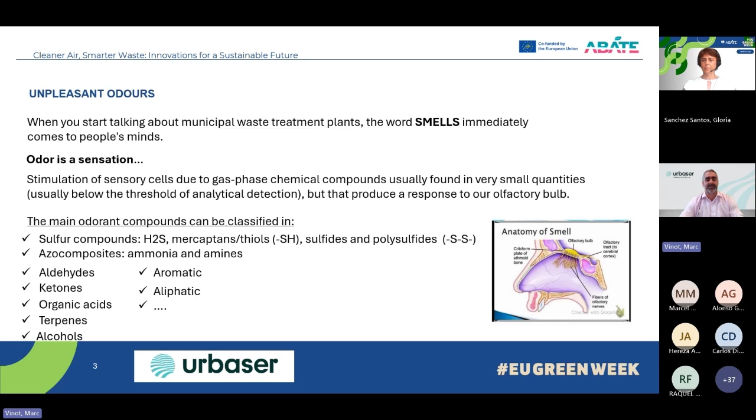The main odorant compounds, if we want to classify by main groups: we have the sulfur compounds - H2S, mercaptans, thiols, sulfides, and polysulfides; the azo compounds, ammonia and amines, aldehydes, ketones, organic acids, terpenes, alcohols, aromatics, aliphatics. This is the main list - there is more, but these are the main ones we get when we speak about odor compounds.

In waste treatment facilities, the main odor sources are the nitrogen compounds originating from the decomposition of nitrogen compounds present in the waste. The compounds we get are ammonia - the urine smell; amines - fishy smell; the sulfur compounds from the anaerobic decomposition of the organic fraction. We get hydrogen sulfide - this rotten egg smell; methyl mercaptans - rotten onion smell; dimethyl sulfide - this cabbage smell; and dimethyl disulfide - also mainly cabbage smell.

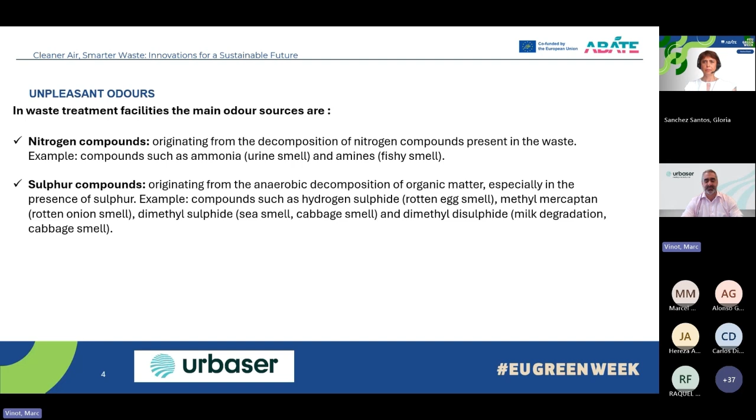We also get nitrogenous organic compounds originating during the decomposition of proteins and amino acids we get in the organic residues or in the food waste, and the VOCs.

For example, in aerobic and anaerobic decomposition processes of organic material, we have a very high production of VOCs that contain carbon and are volatile at room temperature. So we get alcohols, aldehydes, ketones, esters, terpenes, and volatile fatty acids.

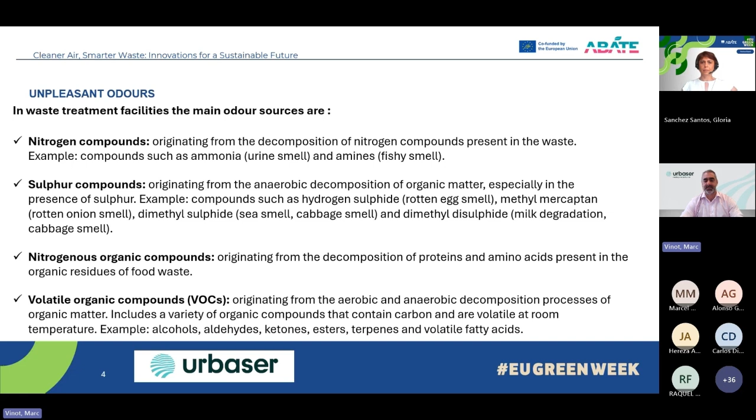So here we have a table of some chemicals with the odor threshold in ppm and the characteristic odor sensation we get with all these chemicals.

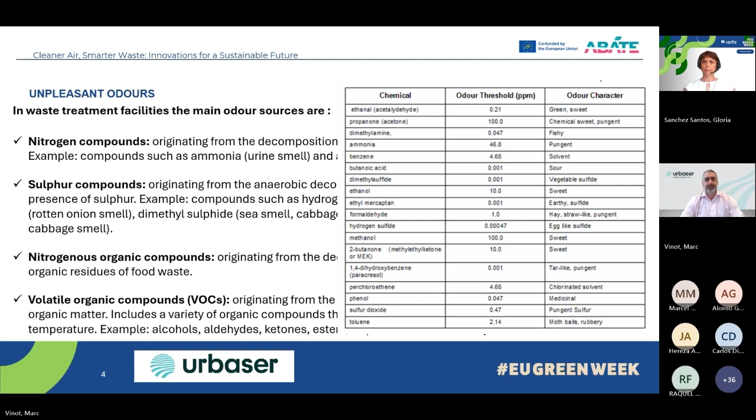Now, if we focus on municipal waste treatment plants, we have some areas where we have a higher generation of odors. The first building or unit where we get this generation of odors is the reception and storage pit, because when we get waste, especially waste with high content of biodegradable material, it's prone to decomposition and odor generation. The pit can have around 2 to 3 days capacity of storage, so we keep the material in this pit for a long time.

Depending on the country, the frequency of collection of waste from the house is quite different. For example, for bio-waste in Essex, it's nearly once a week. So when the waste arrives at the facility, it has already spent a week in a container. Depending on these two things, we can have very high emissions of VOCs and other compounds.

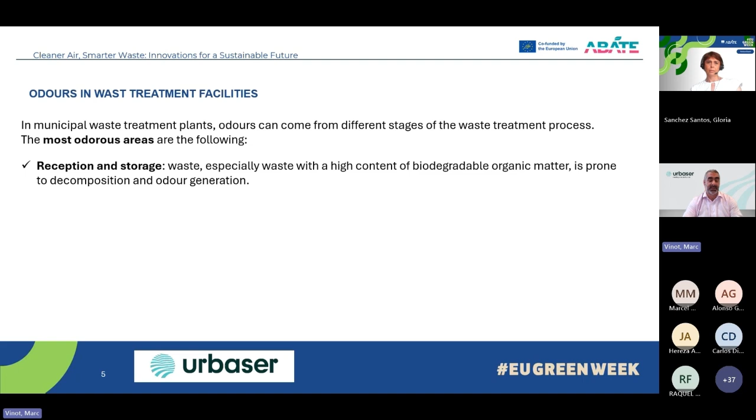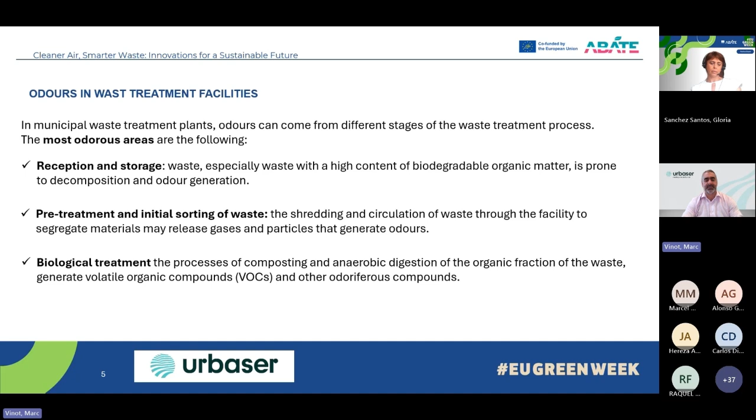Afterwards, we have the pretreatment and initial sorting of waste - the shredding and circulation of waste through the facility to segregate materials - which also releases gases and particles that generate odors. After that we have the whole package of biological treatment - composting and anaerobic digestion of the organic fraction of the waste - and this also generates volatile organic compounds and odoriferous compounds.

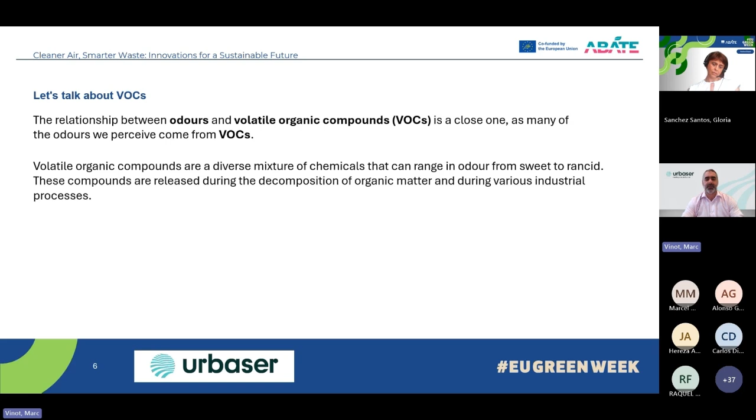So here's the main units where we got this generation of odor compounds. And if we focus on VOCs, there is a very close relationship between odors and VOCs. We all know this. These are diverse VOCs, a diverse mixture of chemicals that can range in odor from sweet to rancid, released during the decomposition of organic material, as I said before.

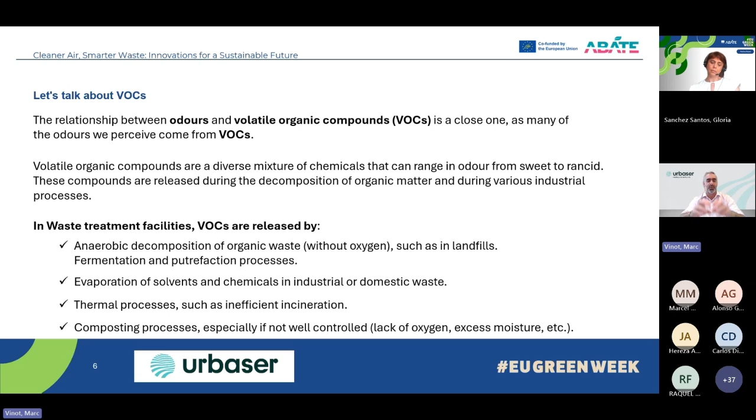In waste treatment facilities, VOCs are released by the anaerobic decomposition of organic waste without oxygen, such as landfill and fermentation in digesters, putrefaction processes, and evaporation of solvents and chemicals in industrial or domestic waste. Thermal processes with inefficient incineration can have very high concentrations of VOCs at the output, and composting processes, especially if not well controlled, with lack of oxygen or excess moisture. Even in a well-controlled composting tunnel, there is always some zone with lack of oxygen, so some points of anaerobic decomposition occur a lot.

But if we go into the different areas I mentioned before, for example the reception building and storage pit, sorry the tables and graphics are in Spanish, we see that we have VOC curves between 13 and 11 ppm, which in odours is about 6 to 2.2 thousand odour units.

And if we look at the main groups of compounds we got in this part, it's aromatic hydrocarbons, ketones, then some terpenes, a little bit of alcohol, and aliphatic hydrocarbons, organic acids, esters, and some halogenated compounds.

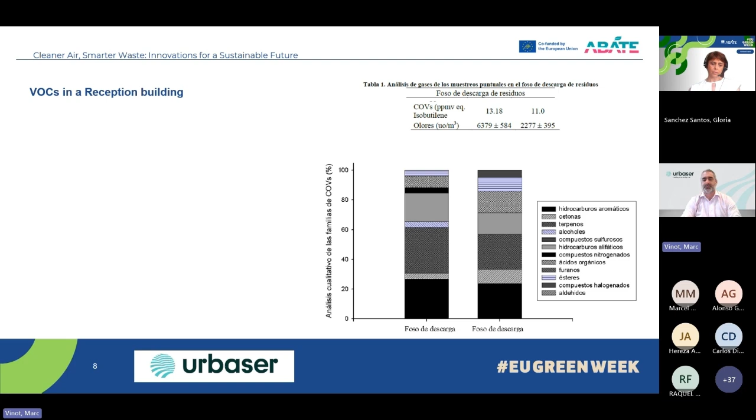Okay, and we see for example, during 48 hours, we can see some peaks due to a very high quantity of trucks coming into this area.

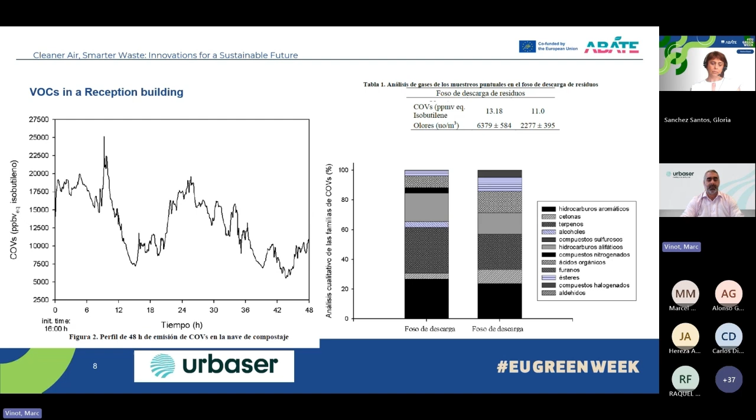If we go to the pretreatment building, we can see that the curves are quite high, between 31, 4, nearly 5 ppm, depending on the hour of the day, meaning depending on how it's working, and between 12.3 thousand to 900 odor units per cubic meter. The main families are the same as the ones we got in the reception area.

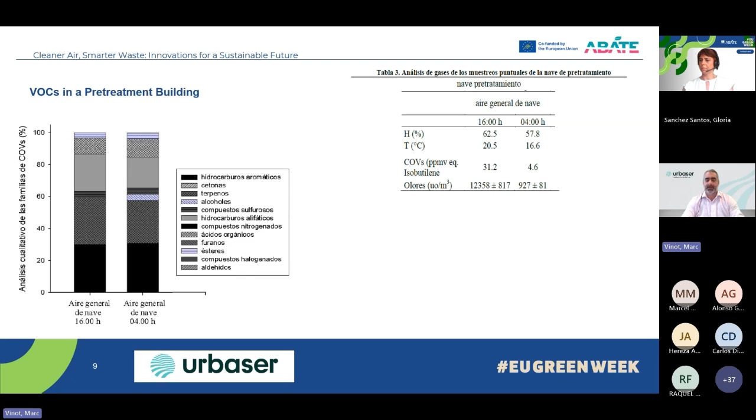If we go to specific equipment in pretreatment, it's quite different. If we go to a ballistic separator, for example, we are about 22 ppm of VOCs, but in odor it's only 3.5 thousand odor units. In a refuse press, the quantities are lower in terms of VOCs, between 3 to 10 ppm, and 400 to 2,000 odor units, depending on the moment of the day. In terms of families it's the same, but we start to have aldehydes in some equipment, found at the top of the columns of each piece of equipment.

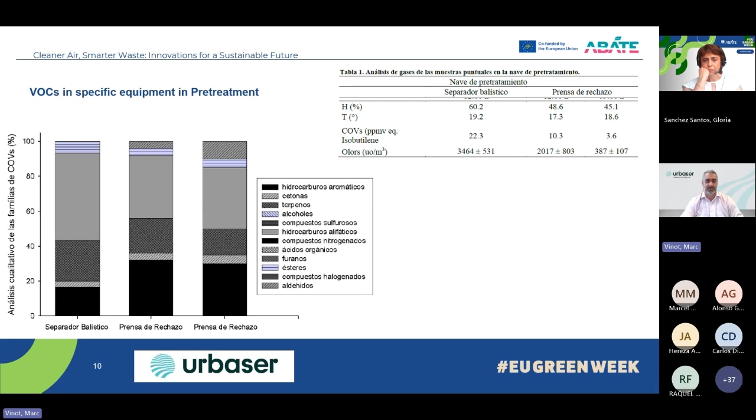If we go to a composting unit, we're in a composting building. We got VOCs around 17 to 7, depending on the moment of the day, and between 6 to 2,000 odor units. It occurs the same in terms of the families of VOCs, with some aldehydes at the end, esters and aldehydes in the composition.

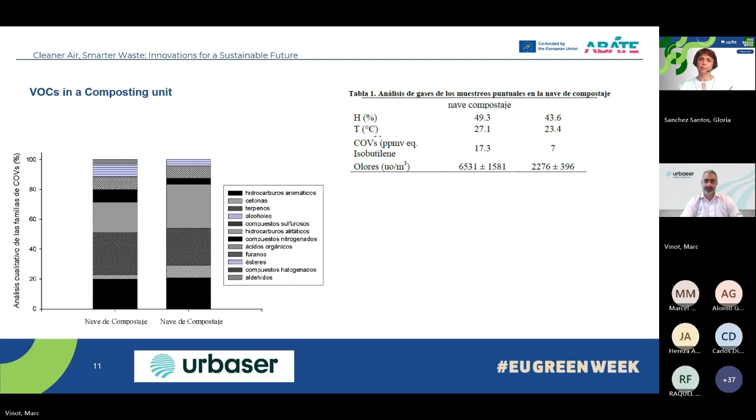So as somebody mentioned before, speaking about the limits, we have to comply with some limits in terms of emission, the total VOC. This is indicated in the decision of the EU, 2018/1147, the BAT.

And if we go further, there is a definition of VOC based on an article of the directive 2010/75, and in BAT 34 it explains the different technologies to reduce the emission of dust, organic compounds and odorous compounds, including H2S and NH3.

And in this same BAT, there is an associated emission level, mentioned before at the beginning of the webinar, for total VOC, between 5 and 40 milligrams per normal cubic meter. Obviously 5 must be with a TO, that's clear, but the value of 40 is normally the limit that is asked to comply with.

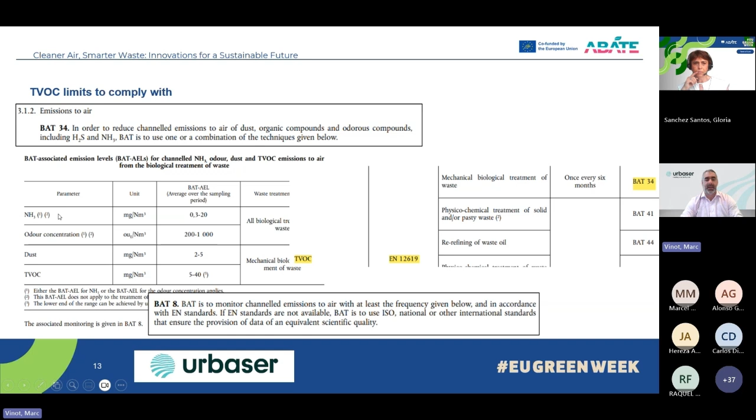And what happens at the end? We are speaking about odours because, as we see, one of the limitations is total VOC and odor concentration. We have the dust, H2S, and NH3. Well, there is no limit for H2S, but there is for NH3 in the BAT. But we are making the measurement of total VOC with flame ionization, which means that methane, which is odorless, will be included in the measurement of total VOC.

And as I said, in the reception area, the storage pits, or in the composting phase, and obviously in the anaerobic digestion building when we get dehydration of the digestate, the output material of a digester, at the end there is some methane, and it means that when we get the limitation only on total VOC, it includes the methane.

So actually, there are some facilities where it's quite hard to comply with some values when they are not asking for 40 milligrams per cubic meter, but for 30 milligrams, and the value of methane makes it quite hard to comply with the limits they are asking when they are asking for a very low limit, if you have a biological treatment, or well, if you don't have a thermal oxidation.

1 minute, Marc. Okay.

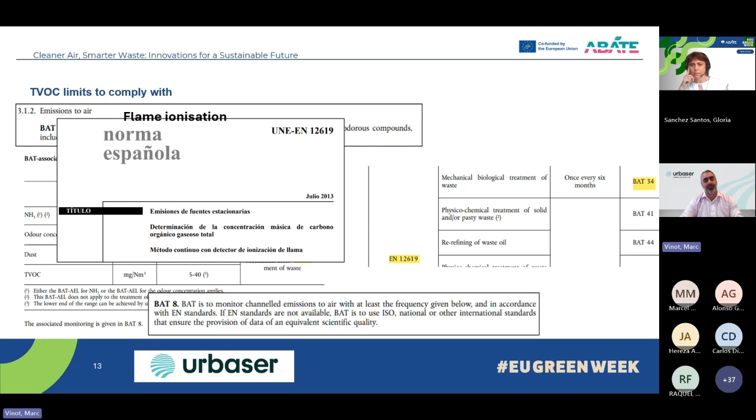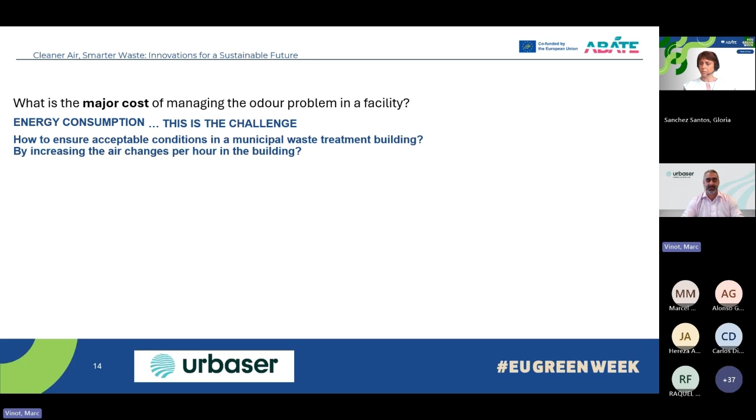In some countries they are starting to speak about non-methanic VOC to avoid having methane, but there is not a measurement procedure existing. The major cost of managing the odor problem in a facility is energy consumption. This is the challenge. So how to ensure acceptable conditions in a municipal waste treatment building? Increasing the air changes per hour is a lot of money because it's a lot of flow. So this is an issue.

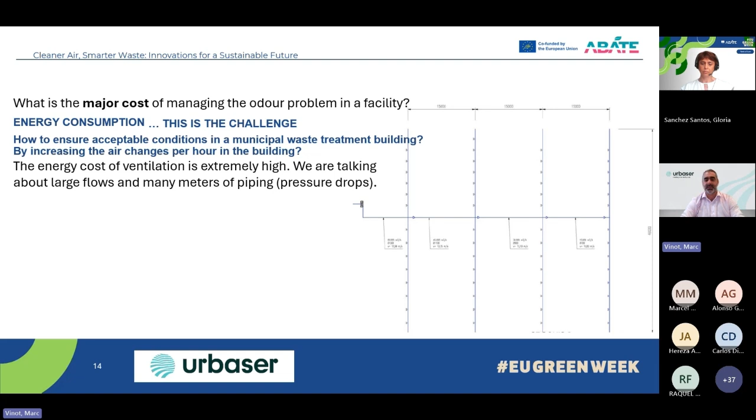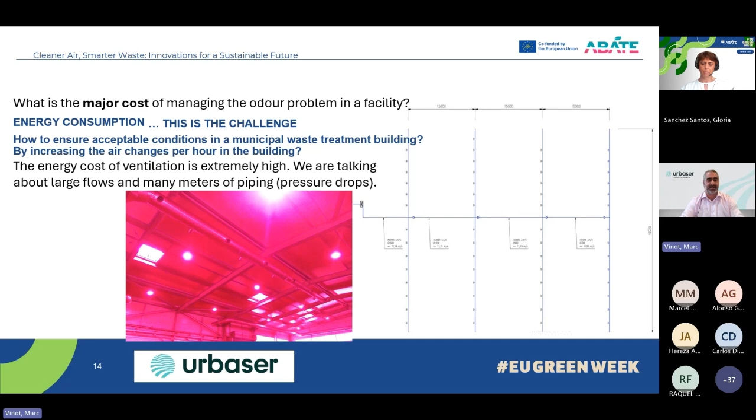In the past, the grid of aspiration piping was more like you can see in this picture of a drawing, but it's a lot of pressure drops. In this picture, it's nearly pink, but you can see this type of concept of ventilation. Also, some aspiration points in some equipment, but it's a lot of pressure drops. So we have to think about the process, the equipment.

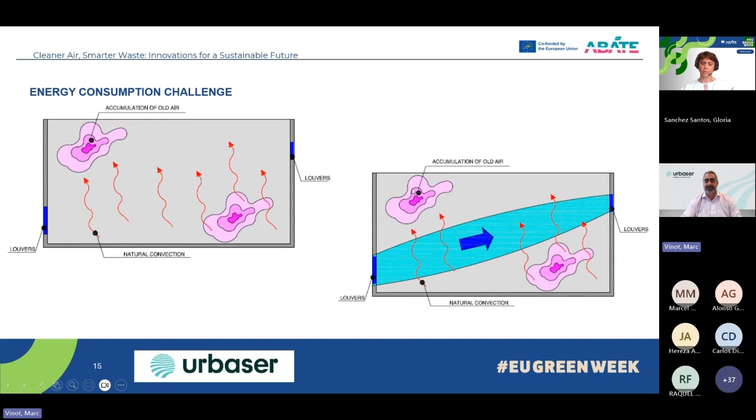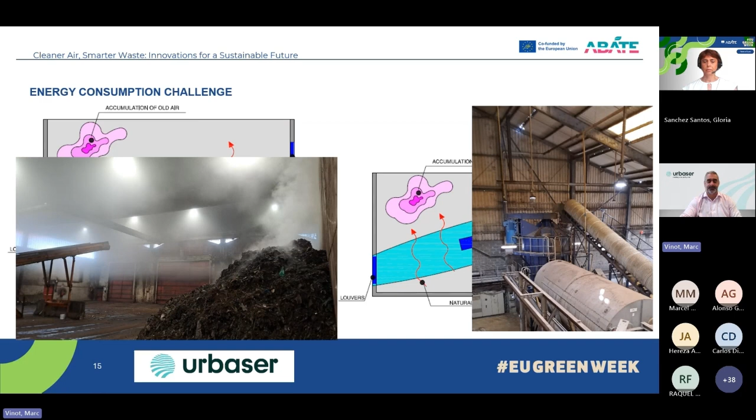That shows that in Urbaser, one of our main objectives is decarbonization, and one of the ways is to reduce electrical consumption in all the ventilation systems. So as I explained, we have the waste composting and the stagnant air, because the extraction can't have an impact on more than, let's say, 1 meter in the best case. So our concept is to create a dynamic zone using transfer fans to push the air near the grid and near the extraction pipe to reduce the quantity of piping, the length of the piping, and the pressure drops.

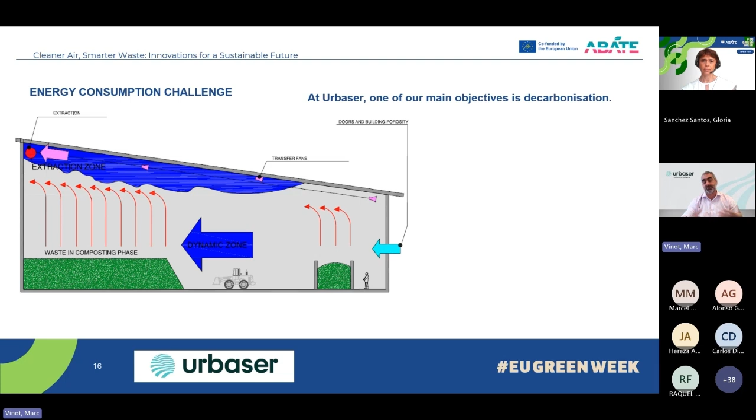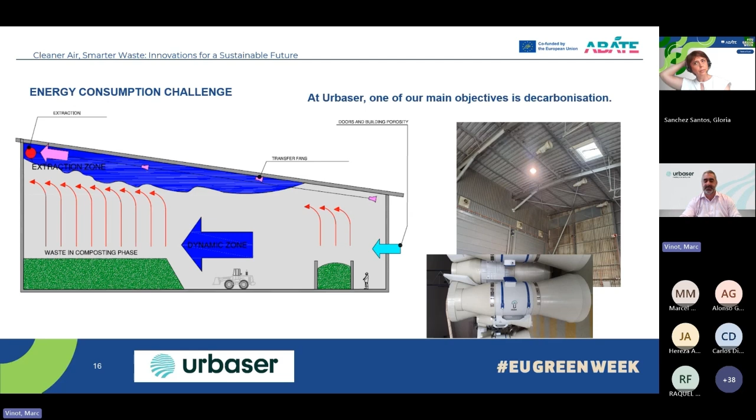Okay, so those fans are only 0.3 kilowatt each, and they have an air supply range of about 20 to 30 meters, so they can push the air and transfer the contaminated air near the grid. So this is the concept we developed with a company. And to check this, we carried out a computational fluid dynamics CFD study to check the design.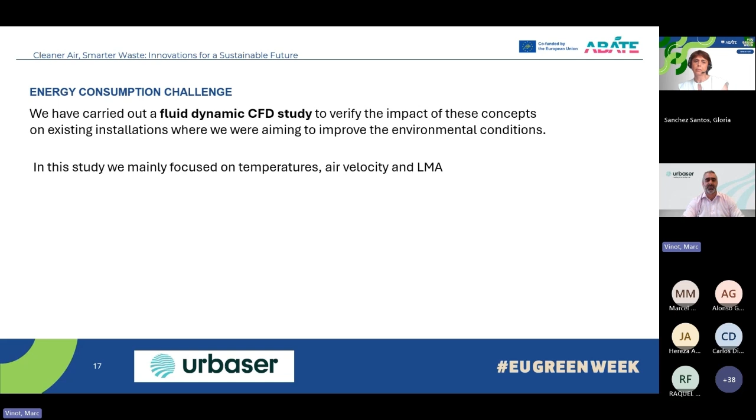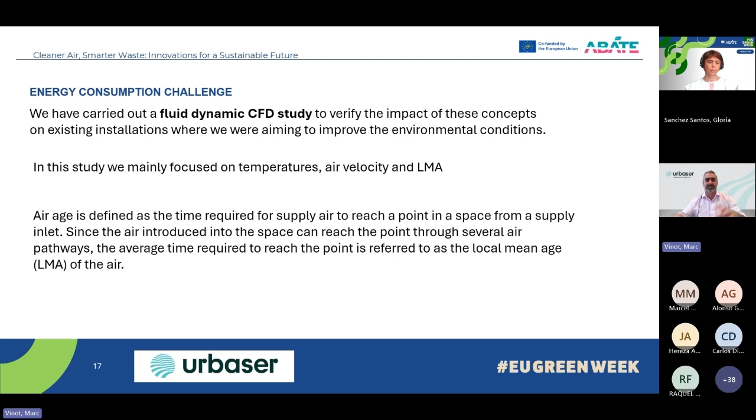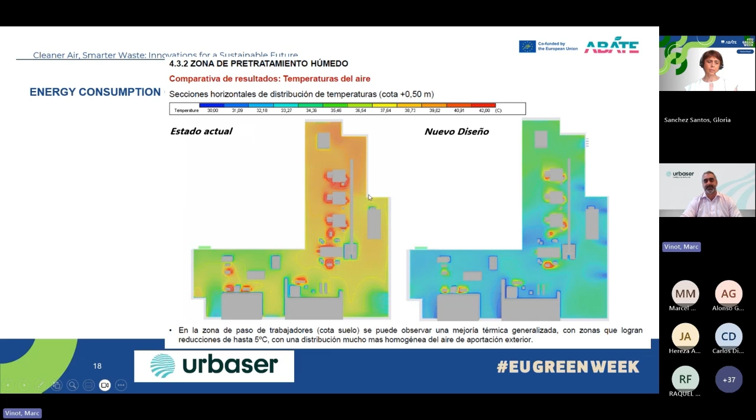We mainly focus on temperature, velocity, and LMA, the local mean age, meaning the air age, the time required for supply air to reach a point in space from a supply inlet. So for example, we have on the left the old state and with the new design, the change in temperature. We were able to reduce the temperature in the building by more than 5 degrees. In that case, it's at 0.5 meter high, and at 6 meters we got the same impact. So the conditions are better in terms of temperature.

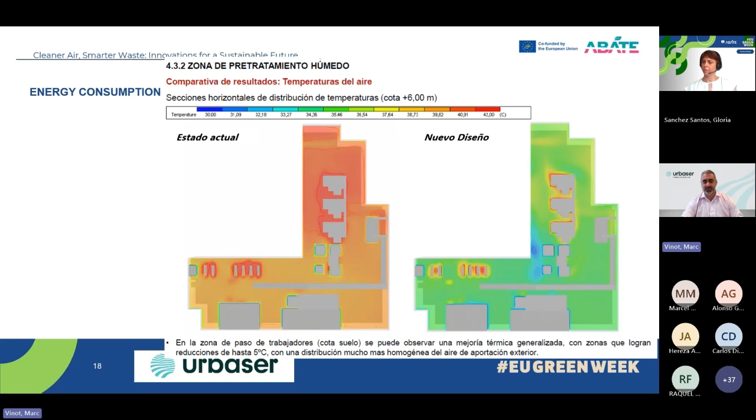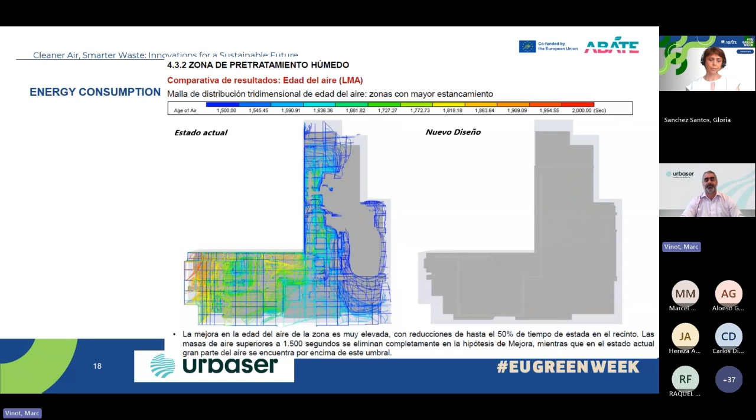We move the air, and in terms of LMA, age of the air, we can reduce the retention time by more than 50%, and avoid stagnant air and some problems you can have in some buildings. Okay, and well, circular economy challenges and R&D.

So we have new developments in environmental technologies at the Alfonso Maíllo Urbaser Technological Innovation Center, and we work a lot on all the ventilation and air treatment issues.